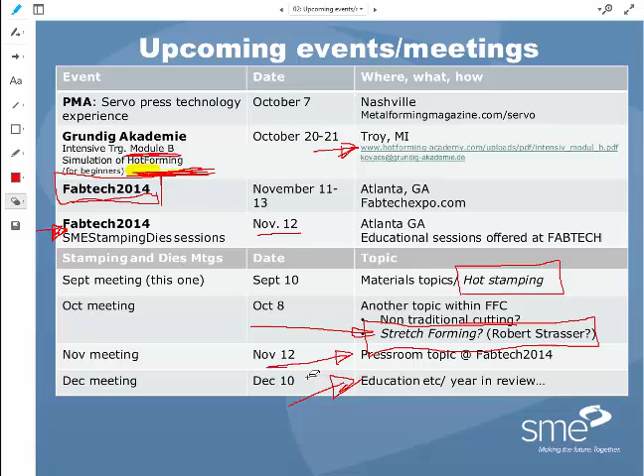I'm going to see if I can find somebody who could talk to us about that in November - that would be a great topic. If we can get hold of somebody in November, that wouldn't be a bad opportunity. Otherwise, next year we have plenty of slots, because we could slot that under design and engineering, material topics, or topics in forming and fabricating. That fits just about anywhere in my editorial calendar. Good suggestion, thank you, Doug.

What other questions or suggestions?

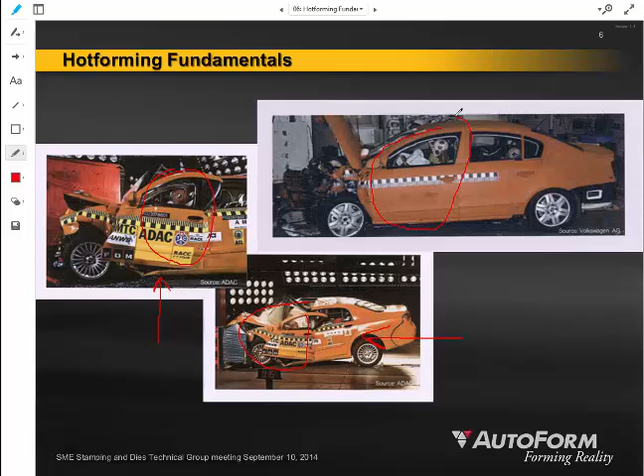One reason we're using more hot forming technology is to deal with the seeming contradiction between wanting to make cars lighter to reduce CO2 emissions and increase fuel economy, while also dealing with the fact that vehicles are getting more complex. The shape, content, and safety we're trying to achieve are all increasing the complexity of parts we've been making and will be asked to make in the future. So hot forming is really something we're trying to do to address that contradiction of how to make it lighter but also stronger with more function.

We're using this new material, boron hot stamping steel, to address that. In order to resolve that contradiction, we are using increased lightweight alloys. We're seeing people going back to aluminum, like the Ford F-150's all-aluminum truck body, done to maintain the strength and stiffness integrity Ford wanted while still making a lighter, safer vehicle for better fuel economy.

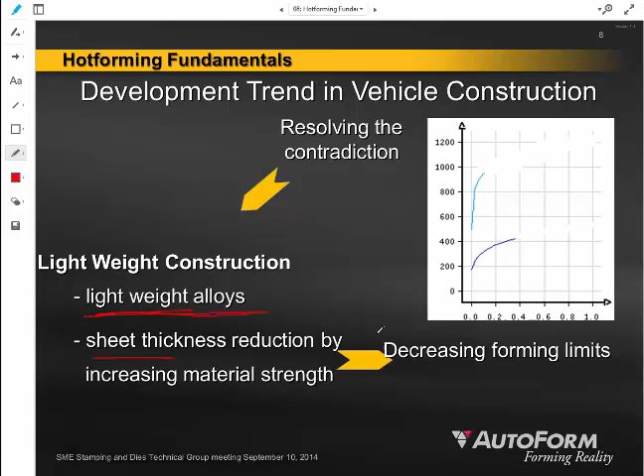Hot forming and hot stamping is a way around that, because using temperature and heating that material up is a way that we're differentiating the desirable deformation that we're doing in the hot stamping operation from the undesirable deformation, which would be the deformation at ambient temperature of a vehicle in a crash.

Other challenges raised by trying to go to these advanced high-strength materials and increased strength materials: not only are stronger materials typically more difficult to form, they have lower forming limits or formability limits, but they also tend to have greater amounts of springback. So as we've tried to introduce lightweight vehicle construction, whether it's high-strength steel or aluminum, in both we do see a greater amount of overall springback.

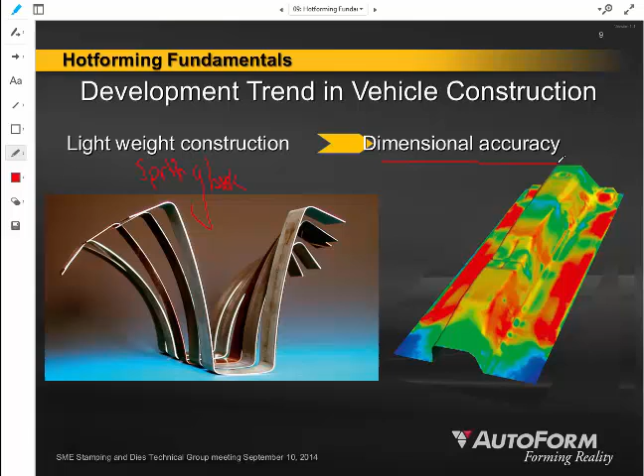And that makes it very difficult for us to achieve our dimensional accuracy goals, our PPAP goals. It doesn't matter if I can make the part; if I can't make it dimensionally accurate to the right size and shape and tolerance, that new strong component or lightweight component doesn't do me any good. So these are the challenges that we're using hot stamping and hot forming to try to address.

When we talk about hot forming and hot stamping these materials, we're usually talking about one very specific type of material that you might call boron steel. And I've also seen that steel called out with a numerical designation: 22MnB5. That would be this boron steel material whose chemical composition I have in this little table at the bottom of this slide. So boron steel is a high carbon steel. It's got significantly more carbon than a typical stamping steel.

When we think about mild steel and a draw quality, we're usually talking about material that has a carbon by weight percentage at 0.08 or below. If you ever hear people talk about steel in terms of the SAE designation, 1008 steel or 1010 steel, that 08 represents the maximum allowable carbon by weight in that material. So this hot forming steel has at least 4 times as much carbon as your typical mild steel.

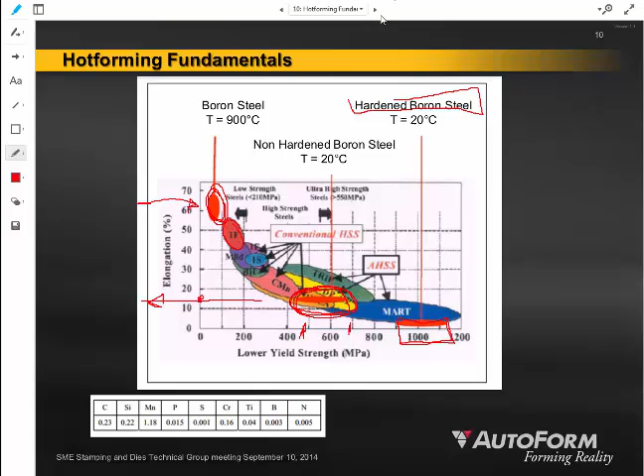However, this boron steel, when you heat it and cool it in this manner, you can end up with a material that is up to 50% stronger than the material was when we bought it from the mill. So we're adding value to the material in two different ways when we're doing this hot stamping. We're adding value by making it take on a new shape, and we're adding value by making the material stronger than it was when we first bought it. So that's a double dip as far as value add manufacturing processes. It's stronger and it's in the product shape.

So what we see is for these materials, again, very much a similar chart that we had just on the previous illustration. But what's interesting about this one is this illustration provided by Audi showing the content of the high-strength steel inside of this A3 vehicle model. You can see that we're using regular mild steel for components like the cowl, the wheelhouse, the body in white parts of the vehicle that are not structural.

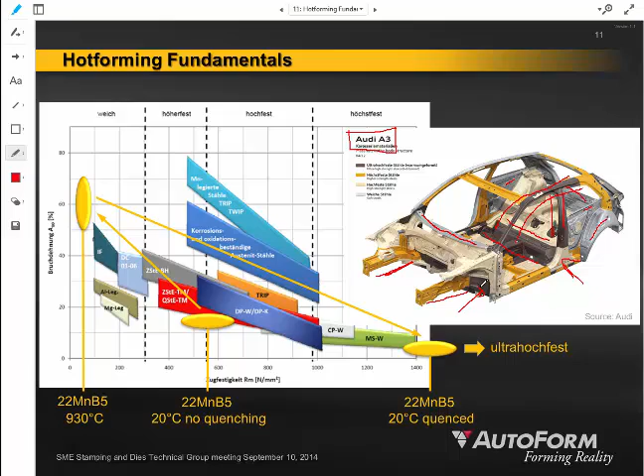However, these engine compartments are using these advanced high strength materials, and we can see hot forming materials in the A pillar, in the B pillar, in the impact beam across the width of the car, in the firewall. All of these areas where we want this very high amount of strength to make sure that the passenger compartment is not having intrusion during an impact, we can see people using these high strength steels.

Now this is all because of the metallurgical effect of, some people might call this the nose diagram, but this is the time temperature characteristics of these high carbon boron steels. And what happens is that when you heat the material up to this higher temperature and then allow it to cool, if you let the material cool slowly, the material is going to form a certain kind of microstructure, whether it's ferrite or pearlite or bainite. Right? These are the microstructures of common carbon steels.

However, if we take that material up to temperature and we're able to quench it in a rapid enough sequence, we're able to bring that material into a characteristic that we call martensite. And martensite is a microstructure common to these high carbon materials that is much stronger and has higher strength than we would expect in a mild steel that was a ferritic or pearlitic microstructure.

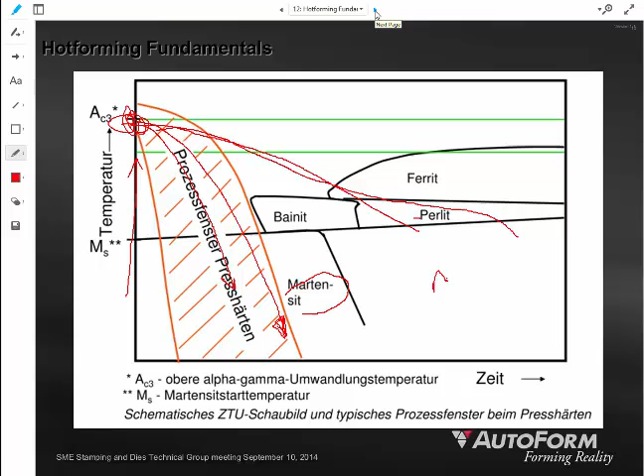So it's very desirable with this hot forming to heat the material up to this wonderful temperature around 900 degrees and then cool it and quench it pretty rapidly in order to force this martensite microstructure to form in the material without seeing the microstructure pass through different phases or different types of microstructure. And that's the reason and that's the benefit for using these hot stamped, hot forming boron materials.

So when we think about hot forming, there's two different ways you can think of these hot forming materials. Another term for hot forming would be this term that we call press hardening. Right, so same thing if you hear people talk about press hardened materials, die hardened materials, they're talking about the same thing that I am right now. They're taking a blank of material, they're heating it up, forming it, and during that forming operation, quenching it to this martensitic microstructure, martensitic phase of material.

There's two schools of thought when you think about this hot stamping. There's what we call direct hot forming, and there's indirect hot forming. Direct hot forming starts by taking the coil of material, unrolling it, creating your blank, taking that flat blank and passing it through a furnace to heat it up very uniformly to a temperature around 950 degrees Celsius, loading it into the stamping die, and inside of the die not only deforming the material, but as we're deforming it, also cooling it and quenching it down to ambient temperature, right?

Something in the ballpark of 200 to 80 degrees C, right? When you get this material down into the range of 200 degrees C to 80 degrees C, you've already cooled it sufficiently that it's going to have the appropriate microstructure. Then potentially you could use a robot to gingerly unload that blank, let it go down to the conveyor belt so that it can get racked, or bring it to another station for laser cutting, laser trimming. Right, this is what we would call direct press hardening or direct hot forming.

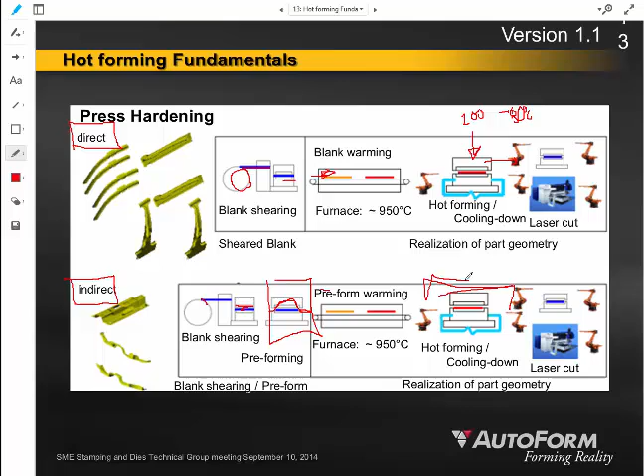Then we can put it through the furnace. So take the preformed thing and now heat it up in those furnaces to 950 degrees C. Then stamp it even more in this temperature controlled die in order to quench it, and then go to the laser cutting. And that would be indirect hot forming.

So we can see that a variety of manufacturers... Here's a picture provided by Volkswagen for the Volkswagen Passat. Their use of press-hardened materials on their most recent Volkswagen Passat allowed them to reduce, on average, most of their sheet metal thicknesses; these parts that are highlighted in red have each been reduced by about 0.2 millimeters in thickness. And that meant also that we could reduce the overall number of parts. They're able to take what used to be a stamping plus a reinforcement, two different stampings, two different parts in the assembly, and replace that with a single stamping that is press hardened.

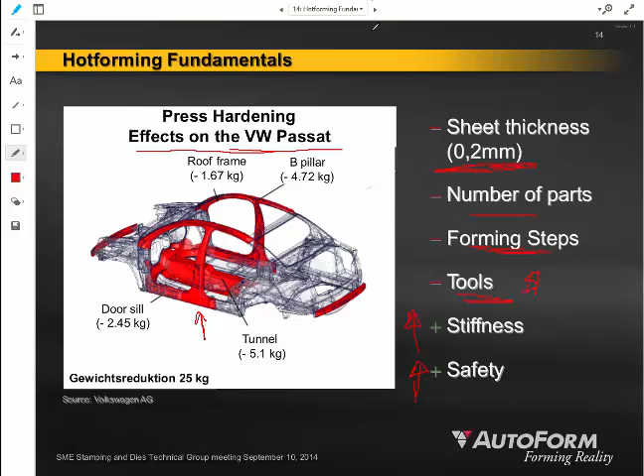That reduced the overall number of forming operations and therefore reduces the amount of tooling. And if you reduce the amount of tools, then presumably you are driving down, in one aspect, the manufacturing cost. They were able to do this and in the meantime achieve an increase in overall part stiffness, because now if we have fewer parts in our assembly, the assembly is more integral and therefore stiffer. And of course an overall stronger component, because we've achieved a stronger component while reducing its mass. And that has very positive effects on passenger and vehicle safety.

All right, so here are some other parts that were used. Again, that was the Volkswagen Passat, but there are components that you might see people hot stamping. Here is the tunnel. It used to be a single component with two reinforcements on the outer, two reinforcements inside, which is now a single stamping. 5 kilograms, that's a 10-pound reduction in the assembly.

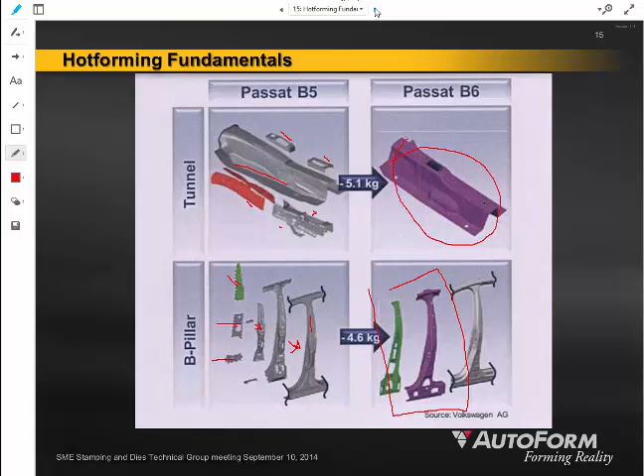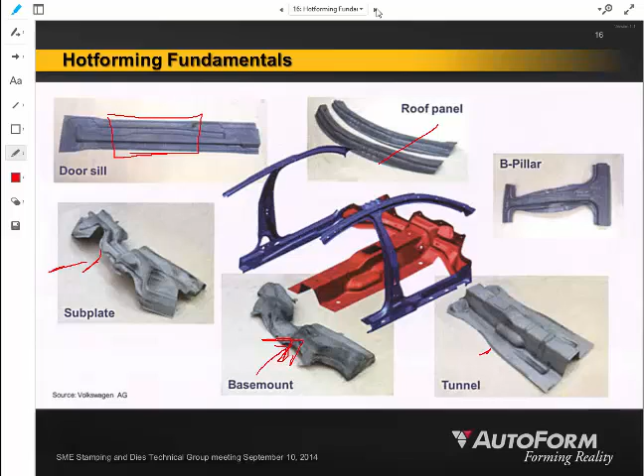And we've seen in this example a B-pillar. The B-pillar used to be the B-pillar itself, a B-pillar inner, a B-pillar reinforcement, and then reinforcements for the pillar, the hinge, and the latch areas. And of course, by reducing those to just 2 hot formed components, we saw also there a 4 kilogram reduction in overall vehicle mass. Similarly, door sills, roof panels and roof bows, B-pillars, tunnels, the firewall base mount and the subplate at the front of the passenger compartment, all candidates for this hot stamping.

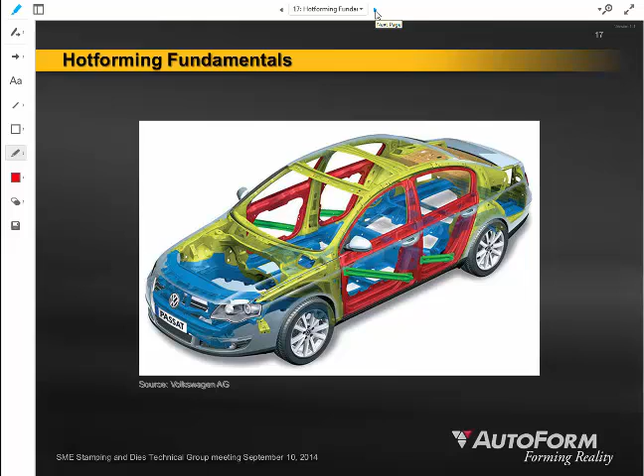So we are seeing an increased amount of content in our vehicles of this hot stamped material. So it is a technology that is relatively well accepted and certainly proliferating throughout the stamping industries. Just have a quick picture here for you of this is the blank that is red hot. So that's the blank coming out of the furnace.

The furnace would have been back to the left of this illustration, and the press and the die are probably going, oh no, here's the furnace, excuse me, drawing it sideways. There's the furnace, right? So the material came out this way out of the furnace. Here it is getting picked up after coming out of the furnace, and it's going to go this way into the stamping operation. All right, that is red hot, and that material at that temperature is above the recrystallization temperature of the steel.

When you bring that material to that temperature, 950 degrees Celsius, 850 degrees Celsius, that material is a supercooled liquid. That material is solid enough to have form and shape and to be picked up, but its crystal structure is still relatively undefined. It's not until that material starts to cool that we see the individual crystals or grains of the material set up in whatever the microstructure of that material is. So this material is highly pliable, highly deformable, but it still has not yet decided what kind of material it's going to be once it cools to room temperature, because that depends on how we cool it.

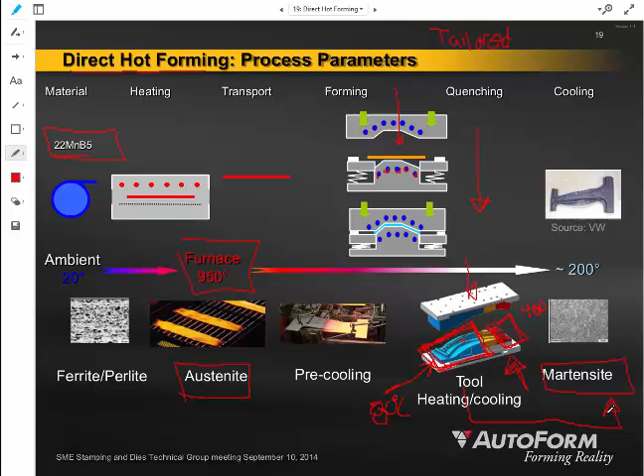This material at the top, where we're quenching it to that 80 degrees C using this very cool tool, is going to form a higher degree of this martensite, and that top of the B pillar would presumably be all at this martensitic microstructure, achieving that 1000 megapascal yield strength.

Here's an illustration of a part that was produced specifically for a simulation benchmark study by an organization called Numisheet. You can see here there's that blank, still red hot, and you'll notice that it's touching the top of the die right about midway through that B pillar, and it's also resting a little bit here at the bottom. As soon as that die starts making contact with the sheet metal, the die is going to start acting like a heat sink for the material, drawing out some of that heat, causing it to cool or quench maybe a little bit earlier than was planned.

Therefore, when we talk about this hot stamping, hot forming, it's really something that's going to be very reliant on our ability to engineer and mathematically simulate these forming operations in order to assure that we get the product characteristics we finally wanted. Because it is possible that this early contact in different areas of the blank, or even where we're holding it with whatever robot or automation loading that blank in, any initial contact could cause the material to cool at a different rate and not quite get the material properties that we were aiming for.

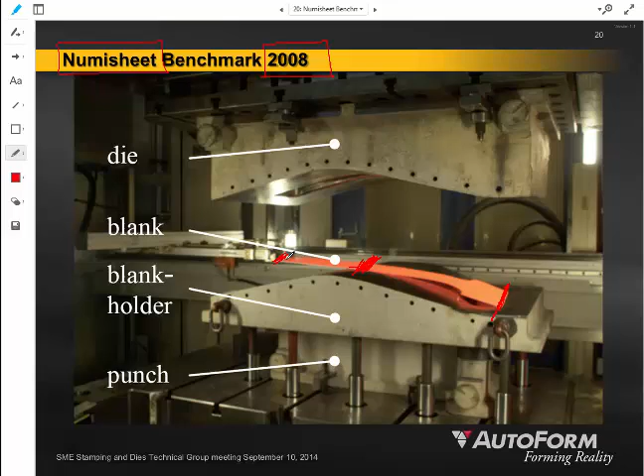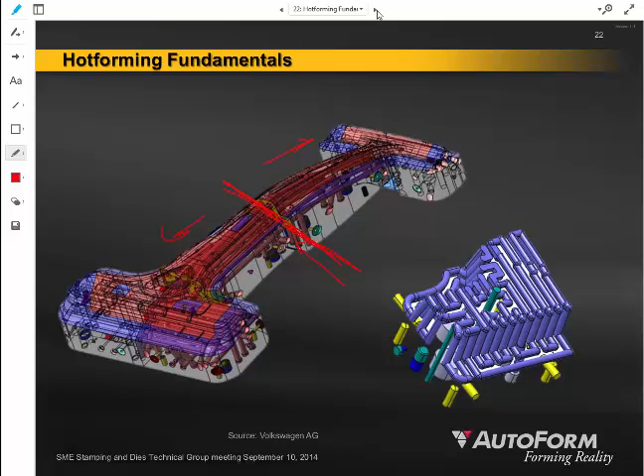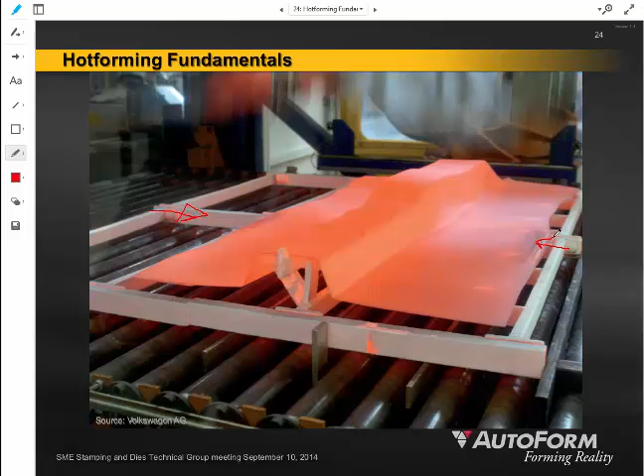Here's an example, a photo of a part in indirect hot forming. You can see this part is coming out of the furnace red hot, and it already has some product shape applied to it. In this case, they did some room temperature deformation of the part, then it went through the furnace to get heated up to the appropriate temperature, and then hot formed and additionally quenched and cooled in that environment. That gives you the ability to form more sophisticated, complicated shapes than we would achieve if we just did it in one hit.

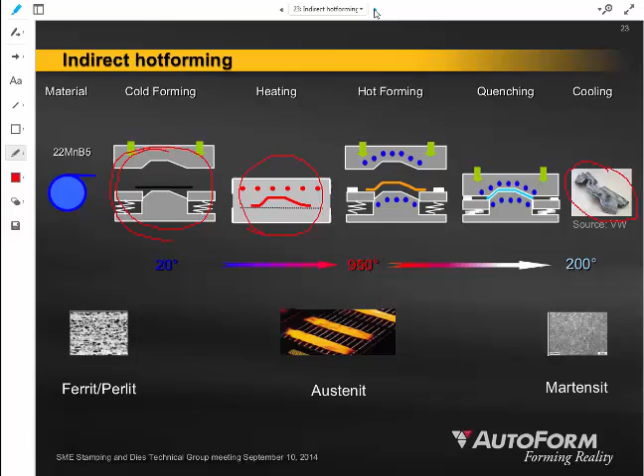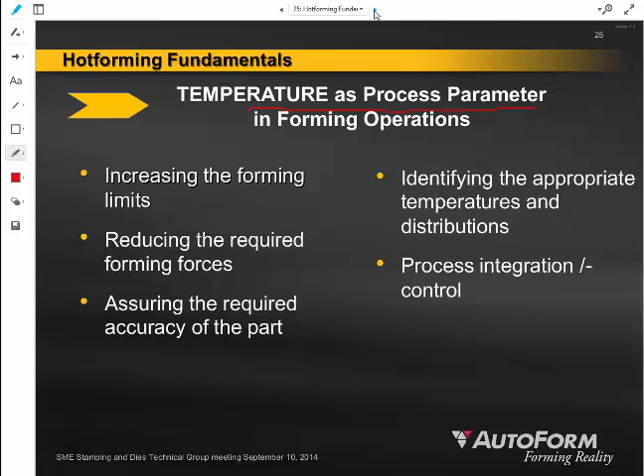As we start looking at this type of deformation, it adds a new layer of complexity to our metal forming operations. We have to understand that temperature is now an additional process parameter, one we'll have to plan for, try to control, and predict how it will affect the forming operation and product performance. That means we have to have material characteristics mapped out at different temperatures throughout the forming operation, requiring a much more complicated methodology of testing our material before it comes into our model, and the ability to predict how that material behaves stress and strain wise at 800 degrees Celsius compared to 500 degrees Celsius.

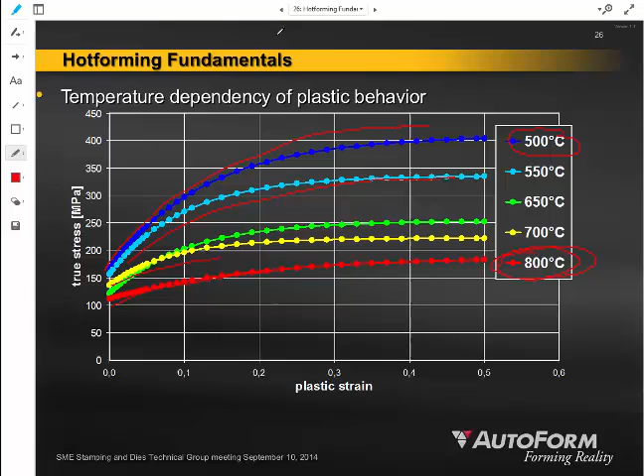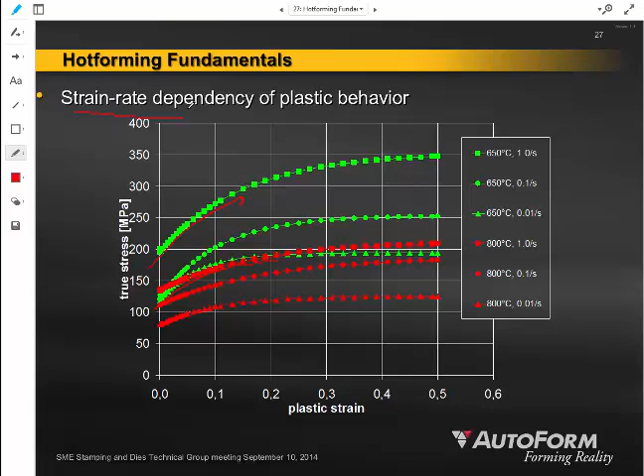We also have to know not only how different temperatures behave, but material also has different strain rates. The faster it stretches compared to being stretched slowly, we see different characteristics between the stress of the material and its strain, adding another complexity to our forming operation in order to mathematically model it.

Here's some discussion on this idea of tailored tempering, which I mentioned briefly before. For this particular B-pillar, we wanted tailored tempering because at the bottom portion compared to the top, we want different overall tensile and yield strengths in order to get different characteristics of the finished part.

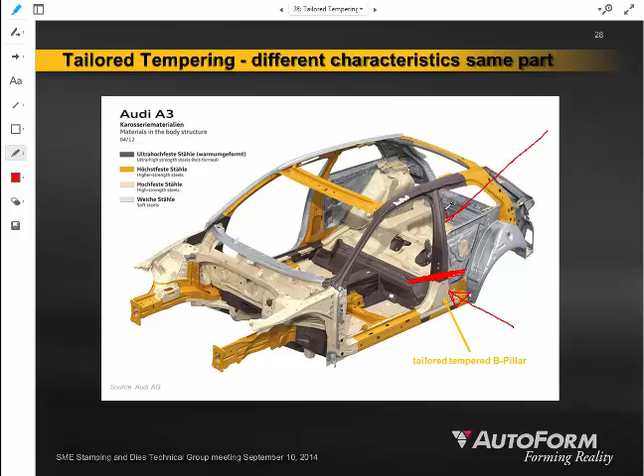In this case, they quenched the B-pillar at the top, which forms a lot of that martensite microstructure—the strongest, highest strength material this B-pillar will ever see. Then there's a transition zone to material allowed to cool or quench slowly; the die at the bottom portion is maintained at around 400 degrees Celsius. By holding that die warmer during forming, we ensure its microstructure is different than the top half, which is cooled to 80 degrees Celsius. That means a much higher strength material at the top of the B-pillar, and a much lower overall yield and tensile strength at the lower portion.

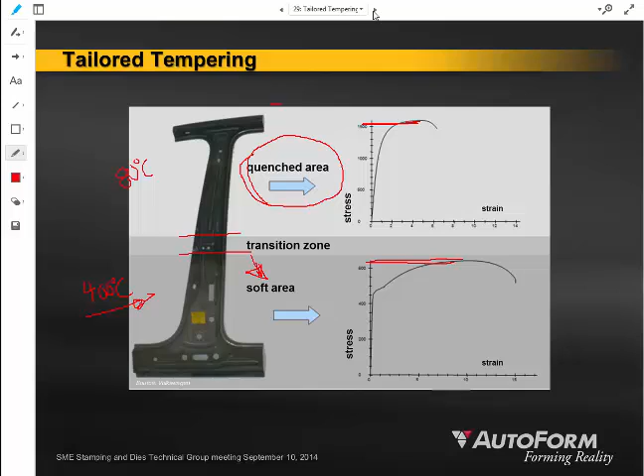That was engineered and designed to give a certain product performance for that B-pillar, as selected by the structural or product engineer.

So any material that is cooled very quickly forms martensite. The martensite grain structure is a very small grain. Those grains have a different crystal structure that lends them a very high strength characteristic.

If you cool the material a little bit slower, you don't have 100% martensite. Maybe you end up with 99% martensite, 1% bainite, and that gives you a different finished part. If you cool at a much slower rate by holding that die a little warmer, you might have only 90% martensite and 10% bainite. That material ends up closer in strength to the mill spec original strength, as opposed to the tempered, highly quenched strength we get with martensite.

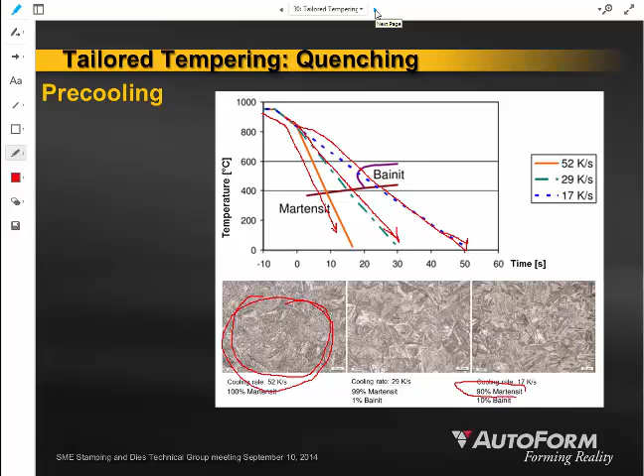You can see in simulation what we want to validate for our product engineers. We want to prove that the area they designed to be 100% martensite did in fact achieve all the strength we were targeting. The top part of this pillar reinforcement has 100% martensite in this portion of the A pillar.

But you can also notice lower percentages of martensite. In this purple area, we're seeing martensite levels as low as 10%. That material is going to be more like the original strength of the steel directly from the steel mill, the coil mill. It's not going to have that value-added quenching characteristic of increased strength.

But you'll also notice a manufacturing-induced difference: perhaps these two areas I circled had early contact with the die during the forming operation. In this simulation, I had spring-loaded pads to support the blank prior to closing the tool.

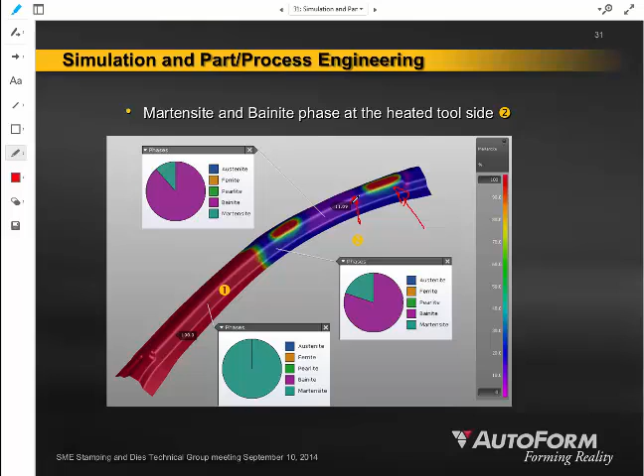What happened is we ended up with areas having more martensite than perhaps people might have planned for. That means these two areas will be stronger than the areas adjacent to them, which could lead to assembly problems or a difference in product performance they didn't foresee or plan for.

We also measure and try to predict that microstructure, but also show the hardness of the material. The strength and stress of the material are measured in terms of Vickers hardness. What is the strength of the material in these areas?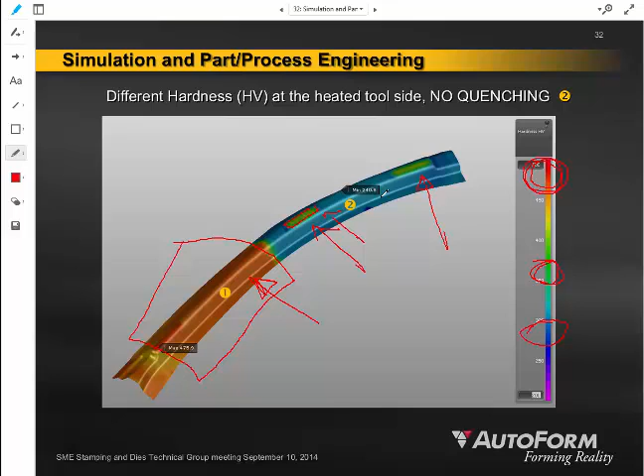So it's very important to validate our assumptions in the manufacturing and product design process, and the way we're doing that these days is through metal forming simulation.

And that's about what I think we can squeeze into our conversation today.

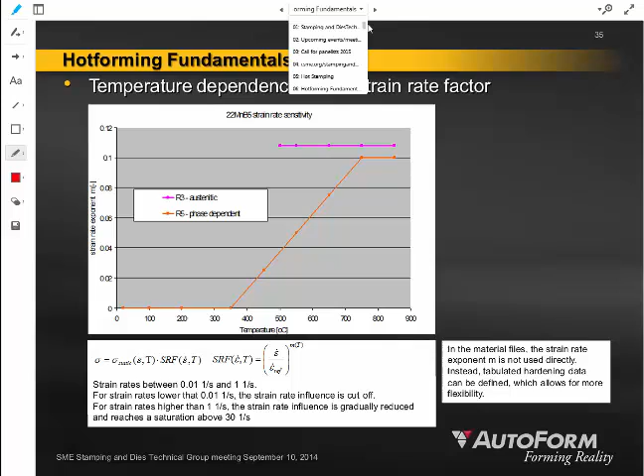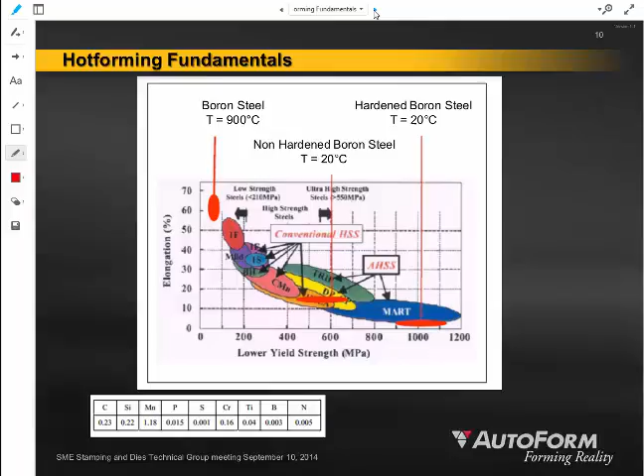Hey, it's Dean. I had a question regarding some of the challenges you've seen in the actual tooling once you get into this hot stamping process. If you have an in-die process heating the material, what impact have you seen on tooling life? Obviously the tool has to be quite a bit different and designed in such a way for that, but I wanted to see your opinion on some of that. Yeah, I'm trying to see, where did I have those pictures of the tool?

There you go. Yeah, there's a few different challenges. One that's not entirely new, but one we face differently, is the idea that we are designing these tools very differently from the way we used to design them before.

The first few times I saw hot forming tools from a distance, I thought they were still prototypes in Kirksite because there was no coring visible. It didn't look like narrow castings with ribs. Instead, it was these giant monolithic blocks of material. It's a different way of having to design your dies. The die design rules and rules of thumb we've carried around for the past 80 years of tool standards are pretty much going out the window because this is a whole new animal.

As far as die life, they have to use appropriate materials for this punch. You can't just make it out of plain gray spheroidal cast iron, because materials like GM248 or GM241 won't behave appropriately if you're constantly heating and cooling them every time they come in contact with a blank. So die design standards are certainly in flux as we try to adapt and adopt these heating and cooling channels throughout the tool.

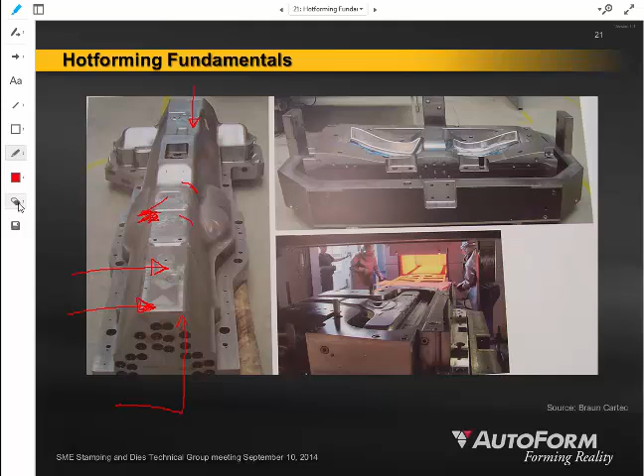Did I see something on one of the slides about selective heating, like using an induction heating apparatus to just heat a portion of the blank? Yeah, one of the ways people pursue that... selective heating is actually really difficult to achieve right now. So there's very little industry-wide or industrial use of selective heating.

They are, however, doing selective cooling. What happens is they pass the whole blank through a giant conveyor belt furnace, like a giant pizza oven. They heat the whole blank up, and at the tail end of that furnace they've got a steel plate hooked up to a massive heat sink that draws out a bunch of heat right as it exits the furnace. They use this selective cooling to try to cool the blank down.

Now there's a lot of R&D going on right now, exactly as you mentioned Bob, trying to use more selective heating techniques like induction. If you could build a better induction heating method, you could only heat the areas you wanted to heat and leave the rest of the blank cool.

When I was at the Technical University in Graz, Austria, they had built a proof of concept induction heating furnace. Rather than the 150-foot long radiant heat element furnace like at Gestamp Brazil, which has to be heated up to 900 degrees C throughout, this induction furnace at TU Graz was only about 15 to 20 feet long, so about 10% the overall length of a typical radiant heat furnace.